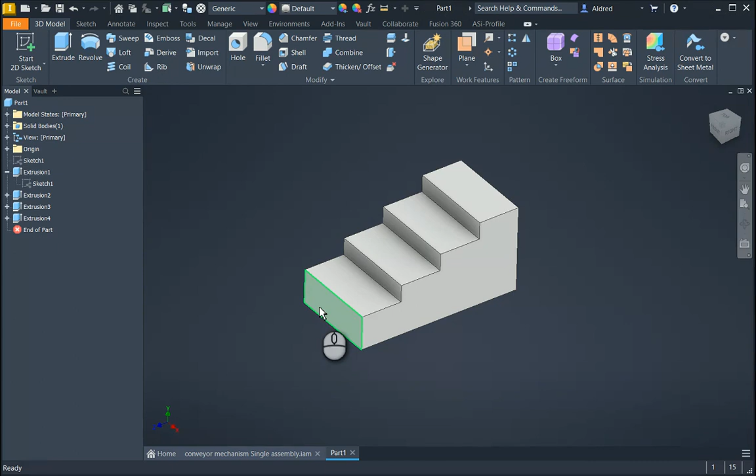There were different levels, and the equipment had to go at these different levels. As the project went along, there were a lot of work planes because of the many angles in the building I was working in, and it became very cluttered.

So the one thing I wanted to do was work on each level individually so that I could see exactly what I was doing, without having all the levels as well as all the equipment visually on the screen.

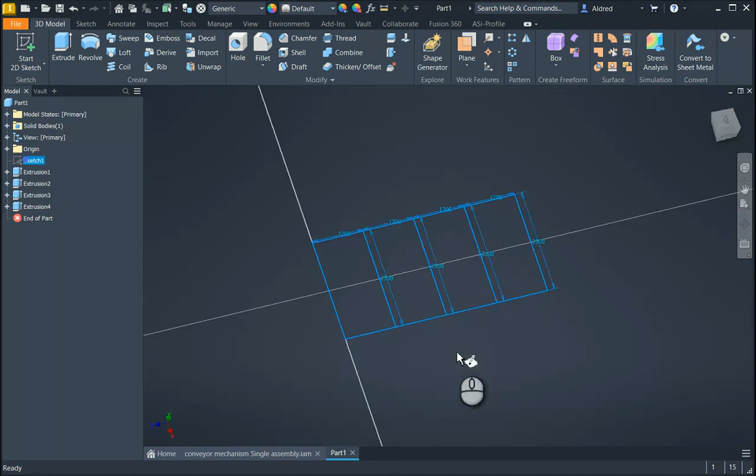When I started off, and this is what you might do as well, I basically created my 2D sketch, brought in my 3D DWG, drew this over here, and then created my different levels.

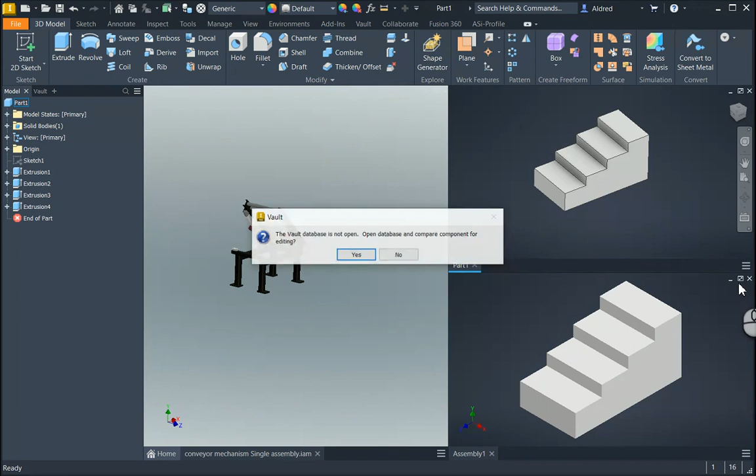Then I decided to put this into an assembly. So let's open up an assembly here, and I would drag my part into the assembly. Let's arrange it. Okay, so this is now my base view.

And then I decided that I'm going to put in my conveyor, so this is going to be my equipment. Just arrange it again, and we can drag that little guy in over here.

Now, as I was dragging it in, there were a lot of work planes, and things were quite awkward and hairy, so trying to get the visibility on over here was a little bit difficult.

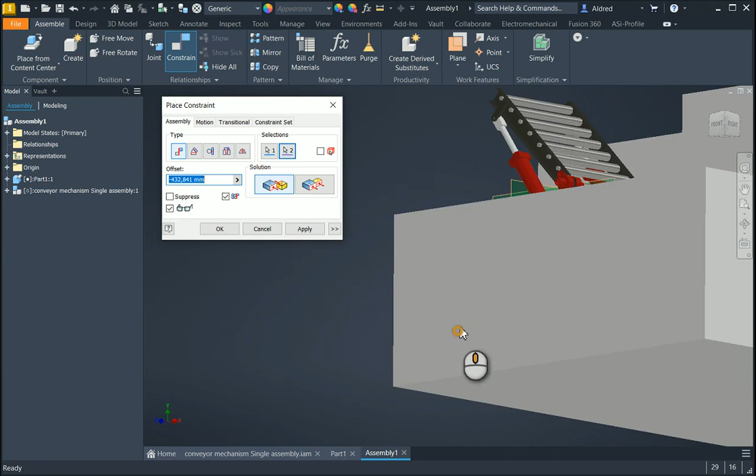You can see there I would have constrained it, but I didn't want to see level 2, level 3, and level 4. So what could I have done differently to accomplish it?

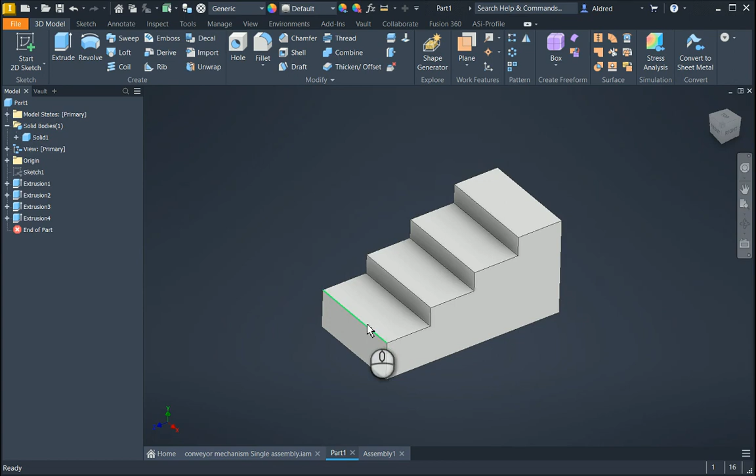What I did was create each extrusion as a different body. At the moment there's just one solid body, and I'm going to create 4 solid bodies. You'd start again: go back to extrusion 1, make your sketch visible, then create each extrusion and make it a solid body.

Now I'll just show you how that would have been done. Make it visible - there's your first body. Go to extrude, select your second one, that would be 2,500, and make sure you've got the new solid option on. Click OK, and you can see I've got solid 1, solid 2.

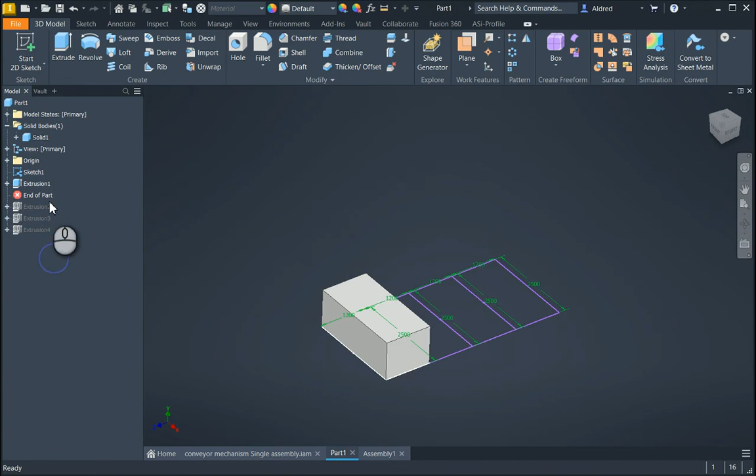But because I've already created my extrusion 2, 3, and 4, I don't actually have to go through this process over here - I can just go and modify what I've already done. And that's the power of something like Inventor with its parametric and history-based modeling.

Okay, level 2. And you'll notice there, as I select on level 1, it actually selects level 3 and 4 as well, because it's still recognizing that I have joined level 3 and 4 to level 1. But as you'll notice, level 2 is separate.

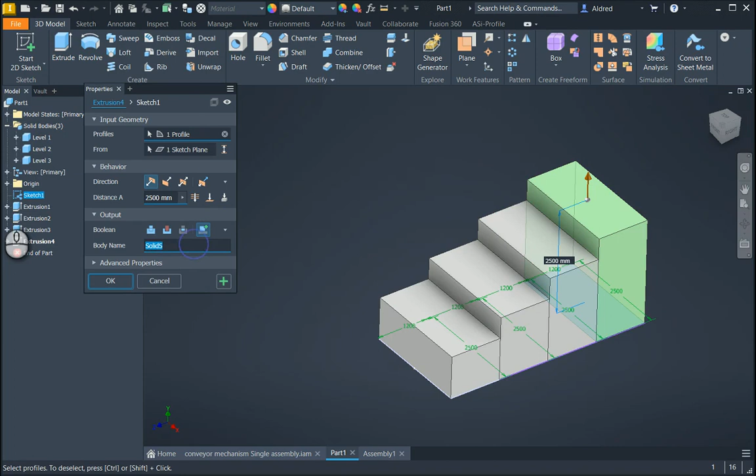So let's go to level 3, new solid. Let's go make this level 3, naming it as we go. Then double click on extrusion 4, new solid, and level 4. Okay, now I've got my level 1, level 2, level 3, and level 4.

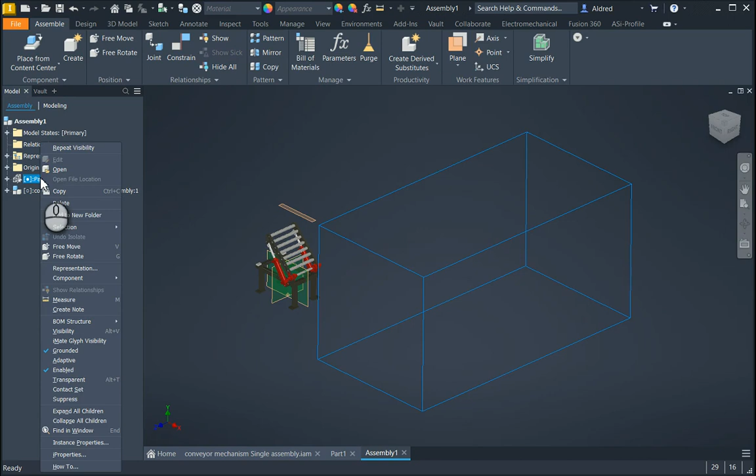Let's go back to the assembly and see what's going on over there. It says it's updated. I select update. Previously, what would have happened is if I tried to take the visibility of this off, the whole thing goes off, which is not really what I want. I want to turn off each level individually. So I've got a little trick up my sleeve over here.

One thing you can do is go over here to part 1 and just close that, so it's now just open in my assembly mode. I'm editing in place. Double click on it and you'll see solid bodies (4). Now I can right click level 4, visibility, and there we go. Right click level 3, visibility, and there we go. So now I'm able to play with these levels and turn the visibility on and off.

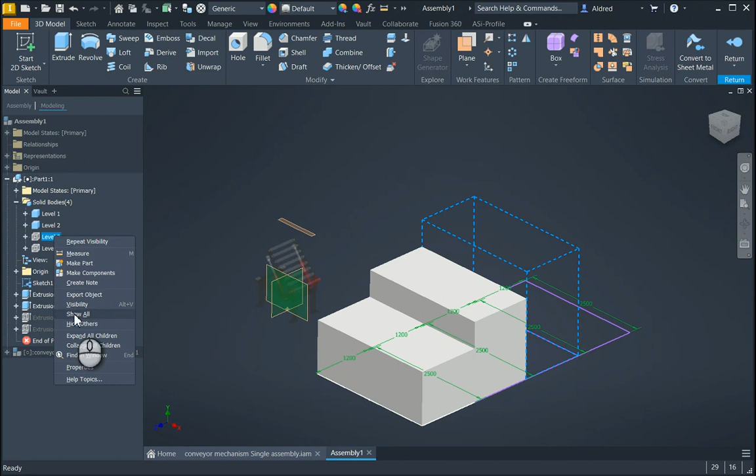But it does get a little bit easier than that as well. I'm just going to put this back on again. If you have never seen this before, or have not really known what it's about, at the top over here you'll see I've got an assembly mode and a modeling mode.

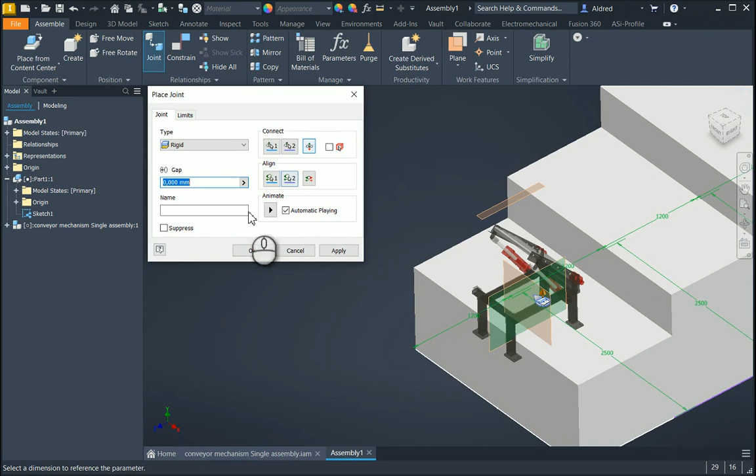So when I've got assembly mode, I'm just going to go put a quick joint over here, let's go put that in the middle. Okay, so we're just going to put that over there. You'll see there's a rigid joint, and that's in my assembly mode.

Notice when I go in over here, I can't see any of my features. So what happens if I go to my modeling environment? You'll see there, I can see my features now and my solid bodies. I cannot see my joints or constraints, so it will sort of clear out any joints and constraints you've created. It's still there, you just have to toggle back to assembly, and there you can see I've got my rigid joint. But with modeling, you'll see I've got my solid bodies 4.

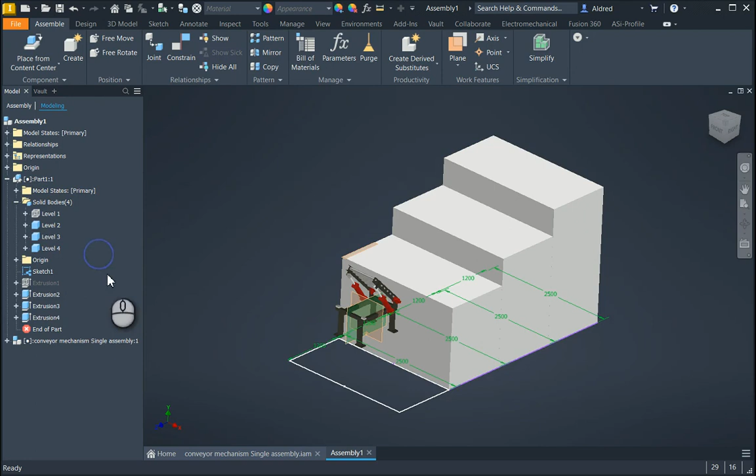Now I don't have to double click inside that part 1 to activate it and then go select it off or click the visibility off. I can go straight in and say, right click, visibility off. Right click visibility, there we go. So a lot more control without having to physically go inside the part, edit it, and then turn the visibility on and off. That's just a little quick tip I thought I'd share with you.

I thought that was quite useful when I was working on this project. This is a very simple example I'm giving, but there were a lot of work planes, a lot of components, and a lot of levels, and there were the walls, and I just needed to get a bit of clarity, working with just what I needed to, turning visibility on and off, placing my components, and carrying on. Thank you very much for watching.